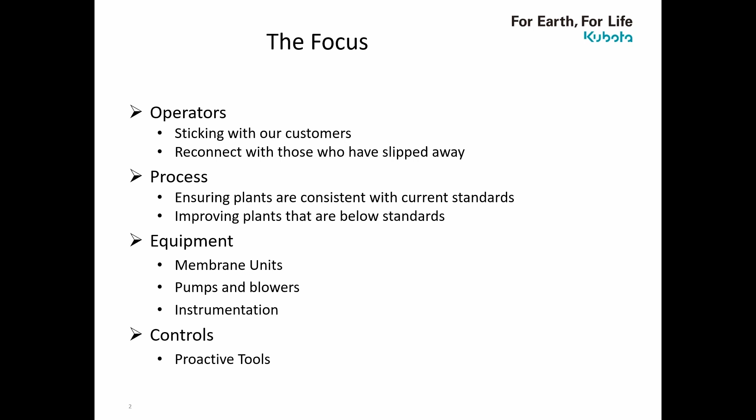But really where we've made a lot of changes is on the HMI side, the interface that you look at your plant through, your SCADA software, your trends, your alarms, and things like that. So I'll talk about some of the things that we're doing there to make it easier to operate, and again, be proactive rather than reactive.

So I talked about the operators. You guys really are the greatest asset for us. If you're not happy with what we're doing, then we need to try to correct that and make improvements.

You know what the plant does and what it doesn't do, and so we'll look at your influent flow, your effluent numbers, and we'll try to fine tune the way the plant is operating off of that.

I bring up training quite a bit. Everybody on this presentation from the Kubota side has been in this business a long time. And so we understand that sometimes there's operator turnover and some new people come in. And so we need to get out there and do some training. And even if you've been at your plant a long time, we still like to come back in and do training. We do events like this.

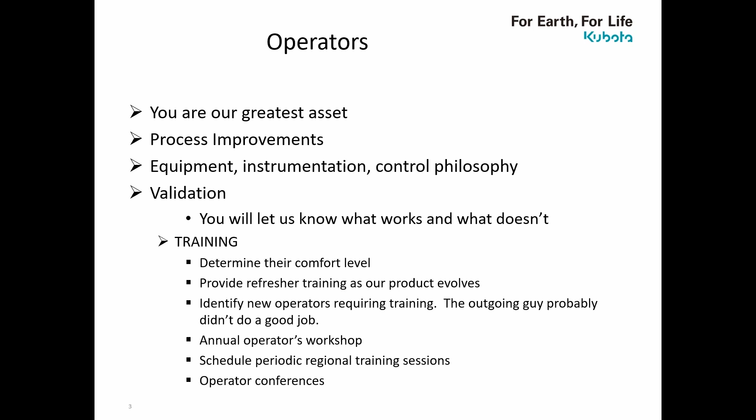Hopefully we can get back to doing them in person soon. But we just want to bring everybody up to speed and let you know what the latest evolutions might be in our approach with our products, our overall systems approach, and just give you some training to make sure that you're still comfortable with the plant and what it's supposed to be doing.

So when it comes to an MBR, again, it's more than just about the membranes. It really is a group of subsystems, and we want to make sure that each of these is designed properly, first of all, but secondly, being maintained and operated correctly. And so the first one is the biological process design, right? We have to treat a certain amount of flow. We need to meet a certain effluent quality. So we want to look at that as a big picture item, make sure, is the plant doing what it needs to do? And if it's not, where do we go and look for avenues of troubleshooting?

Hiro pointed out what we call the fishbone earlier, and really that's just a cause and effect diagram that we use to allow us to troubleshoot different parts of the plant. We have a fishbone for membrane performance. We have one for nitrification, denitrification, really each aspect of plant operation. We have these troubleshooting guidelines in place.

Pre-treatment, talking about headworks and fine screens, and really the screening is the most important piece of equipment in the plant itself. Obviously, if your screens aren't working, you run the risk of damaging the membranes, but it's really a long-term effect that occurs. Debris that gets past your screens, or if there's an overflow, if the seals aren't properly installed and you just get carryover into the plant, eventually that debris will build up and accumulate.

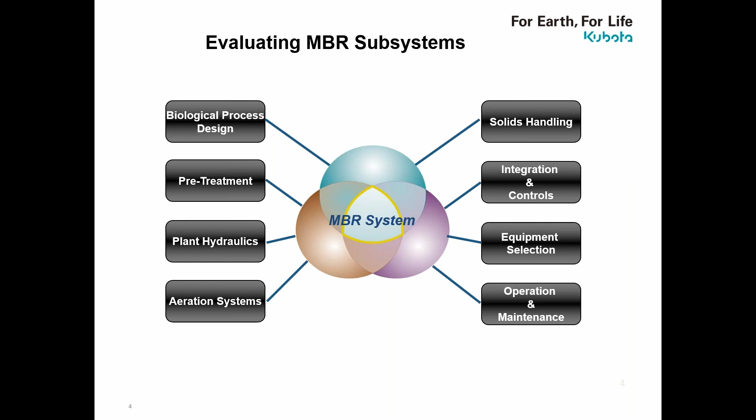And when we start up the plant, come back and give you training, or we upgrade the system, we'll go through all these things again to make sure you're up to speed on what's required. So that's the system approach to an MBR. And the day-to-day things that we'll pay attention to, as Hiro mentioned, he talked about most of these. You've got your transmembrane pressure and permeability. We'll give you guidelines and thresholds about when it's time to make a change or do a chemical clean.

Your air scour rate, that's very important to making sure the membranes stay clean. We're maintaining the biofilm. We're keeping that pumping action going like it should go. Pay attention to the permeate. Your plant is designed for a certain flow rate or capacity, and we'll typically size it up for a design flow and a peak day flow and a peak hour flow. We just want to make sure that we're staying within the design points on a day-to-day basis. We don't want to get in there and try to process more water than it needs to.

For instance, if you have an equalization tank ahead of your plant and you just want to hold up some of that flow overnight and come in the following morning and run it at 3 times its normal value, yeah, that saves on some operation through the night, but it could lead to faster fouling of the membrane. So let's let the plant do what it's supposed to do.

We'll check the process aeration. And when it comes to DO in the system, we have found that just enough is the best approach to go with. We just want to make sure we're putting just enough membrane air to keep them clean, and just enough air for the DO requirement of the process, and don't waste. We want to keep the DO down as low as possible. Even if your plant does not need to denitrify, if we can set it up and operate as if it does, your overall plant's going to run much more efficiently. The process will be better. You'll have better energy efficiency, so that's the way to go.

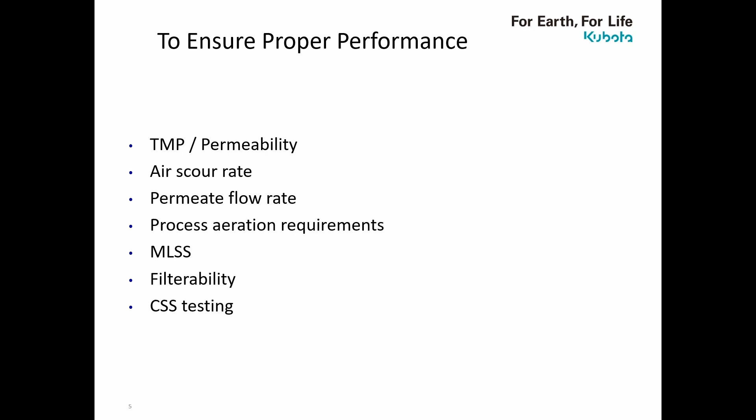Everybody hear me okay?

All right, so when it comes to your process, part of our jobs here at Kubota is to visit the plants and just look at how they're operating and look for improvements to make them more efficient. So we'll look at your influent flow, your loading, your effluent numbers, and say, okay, where can we make an improvement? So we look at your mixed liquor, your air rates, your flux rates, etc.

Sometimes the plants, they'll say it's designed for 1 million gallons per day, but it's only seeing 250,000 gallons per day. If we're using the entire plant to treat that lower than design flow, first of all, it'll be energy inefficient because we're using more air, more membranes than are required. We also might have a lot more process volume than is necessary. So you end up with a really long sludge age, and that can lead to fouling mechanisms on the membrane. So that's one of the things that we'll look at.

We'll do biological calculations and look, will it help the plant if we take volume out of service? And so oftentimes that can be putting some bypass lines or adding some piping and valves to allow us to maybe take an aeration zone out of service, or do some programming changes such that we don't use all the membrane zones on a day-to-day basis. We'll basically make it such that we can turn down the plant to match the capacity to the influent flow and try to pair those up as equally as possible.

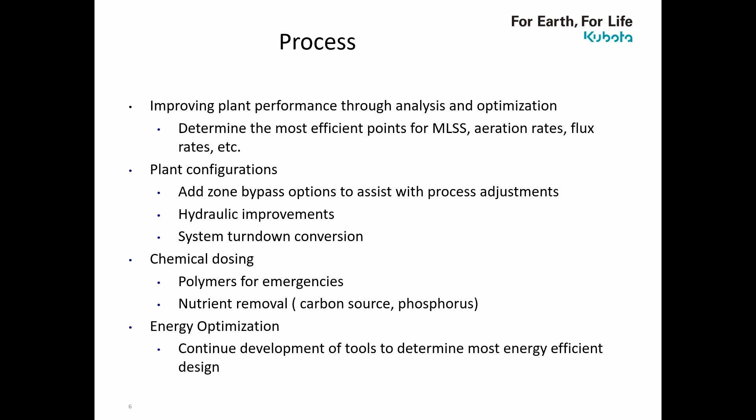So if you do have those old bar screens, that company's no longer in business in the United States, but we have identified options to replace them that are similar in size and economical approaches, but get us up to the screening performance that we like to see.

Pumps and blowers, particularly on blowers, a lot of you probably have the old positive displacement blowers that maybe are 10 or 20 years old now and are not very efficient. There's a lot of new PD blowers out there that are really good. They're compact, they're quiet, they come in their own sound enclosures, and they're really getting more efficient. Turbo blowers were quite the rage 8 and 10 years ago.

I'll just point out when it comes to turbos, you need to be very careful with the selection and the application, because as compared to a PD, they have limited turn down. A good PD blower is going to give you a 4-to-1 turn down, which is nice when you're talking about an MBR plant and optimizing its performance. But a turbo blower, the turn down is usually about 2-to-1.

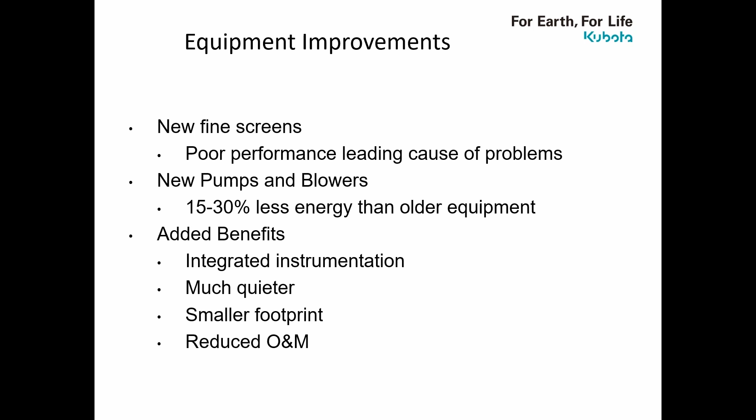And then again, we want to make sure the plant overall is fine-tuned for matching the flow with the operating equipment. So we can look at newer equipment, new screens, pumps, blowers, make your plant quieter, reduce the footprint, and ultimately make your life easier by reducing the operation and maintenance requirements.

When it comes to airflow control, the preferred setup is to have a blower dedicated to the service. So a blower dedicated to your membrane tank, a blower dedicated to your pre-air zone, and you just put it on a VFD and you eliminate airflow control valves. Like I said, we typically use positive displacement blowers because they do have a good turn down, but we can look at the approach there.

When it comes to actually controlling the air, sometimes we do have a single blower that will supply multiple services, and we'll have airflow control valves, actuated valves. So we just want to make sure from a control standpoint that we're monitoring the air and controlling it. What we want to try to avoid is one blower supplying multiple services through valves that are mostly closed, so you're bleeding a lot of energy across that valve, and it makes it hard keeping the pressure and flow rate where you need them. So we'll just look at that closely.

When it comes to aerated zones, we want to keep them at a nice constant level, and I'm talking about good airflow control here.

So that's why you'll see in a lot of our plants, we do what's called a pumping forward concept, meaning the varying levels in the anoxic zone, we'll use that to control the plant, and we'll pump forward into the aeration zone, and then it'll flow by gravity through the aeration back to the membrane zones and back to the anoxic zone. So that's the internal recycle.

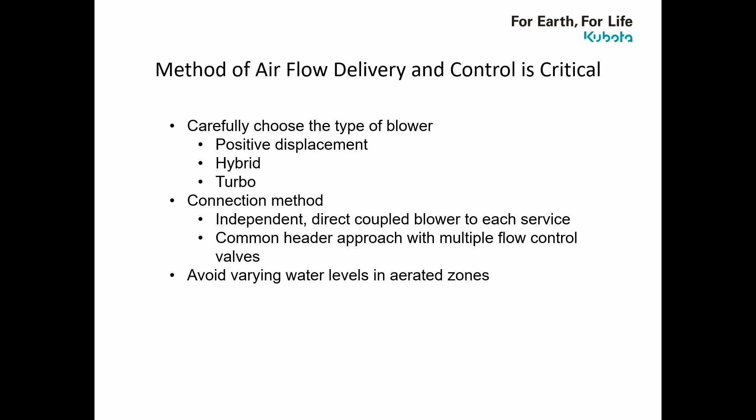By taking that approach, we use varying level in the anoxic, get some partial equalization, but it does keep the aerated zones at a nice constant side water depth, and that does help with controlling that airflow, and we don't have a varying back pressure that shows up on the blowers.

All right, equipment upgrades. So we continue to evolve our systems. What we do now is drastically different than if your plant's 15, 20 years old. And so part of what we'll do with our evaluation is look at where does your plant compare to current standard, our current approach, and we'll look at where are the areas that we can make improvements.

Electrical actuators, eventually they are going to go out. And so we actually look at maybe upgrading those and doing what I'll call a top shelf type of actuator that will last longer and give you some headache-free operation. I've actually seen the failure of an actuator lead to a plant overflow or fouled membrane simply because it was a nuisance and it eventually locked up in a certain position and caused a problem.

Flow meters, we'll make sure that those are working correctly and look at newer versions if that is an option for an improvement. I mentioned some of the instrumentation that we add to help you be more proactive again. And then I always recommend having spare parts for some of the critical components or critical control items. Actuators, right? I just mentioned they can lead to problems.

Level transmitter, that's actually what controls the speed of your plant, if you will, is the level within the system. We'll put it into either a low flow, a medium flow, your peak flow settings. So that all is based on the level in the system.

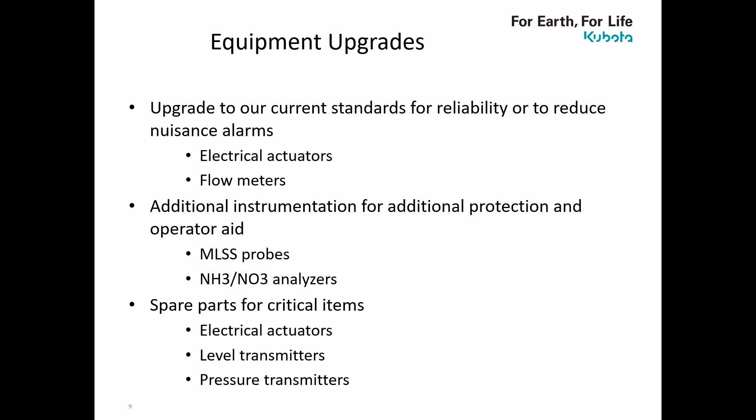It reads the raw pressure, and then our computer, the PLC, converts that into transmembrane pressure. As Hiro pointed out, that's the differential pressure across the membrane. So our computer basically looks at the pressure during filtration, compares it to the pressure during relax, and that's our transmembrane pressure. So that's a very key component. We do have automatic shutdowns associated with TMP, and so if your pressure transmitter goes out, it's going to calculate a high TMP, and then your plant shuts down. So it's good to keep those on hand.

All right, membranes. So we've got a full variety, a full family, and what I'm showing here is what I'll call generation 1, if you will, with the 510 cartridges. And for those of you that don't know, the 510 just refers to the dimensions of the cartridge in meters. So that's a 0.5 meter wide by 1 meter tall. And then we've got the 515, 1/2 by 1.5 meters tall.

And then on the right, we have our SP series, which is the newer version, and I refer to that as the Lego version of a membrane. Really, these modules have smaller plates within them, and they basically stack together and snap together. So they're very modular, and we're actually doing a lot of new plants with this membrane, but also some upgrades and replacements with the new one.

So what we'll do is look at the specifics of your plant and figure out what is the best approach for the membrane unit that will work the best. We'll look at tank geometry, available side water depths, mixed liquor concentrations that are best for your plant, and that'll determine which unit we'll use.

I will say that a lot of our installations have been upgraded that have the old style EK400, the double stack, you see that on the left. We've actually replaced that with what's called an RM200. It's a single deck version of the 515 cartridge, but it gets you basically the same capacity. It's in the same footprint, but it's more energy efficient. It is single deck, so it's easier to clean and maintain.

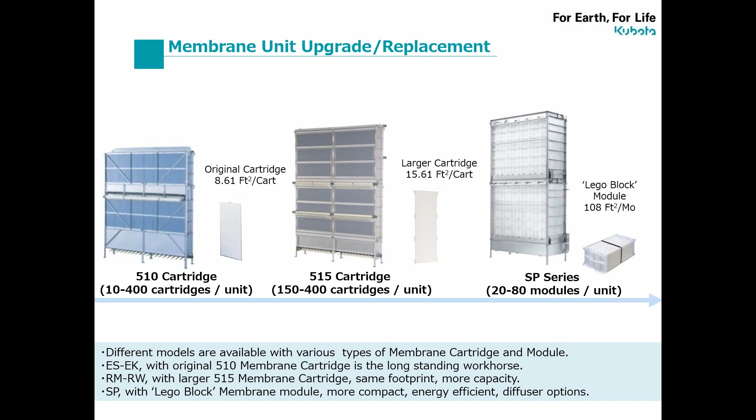We can actually get more flow in the same tank geometry as compared to the other units. All right, so the obvious question is, when is it time to replace your membranes? Obviously if they're damaged, and as I mentioned, really the first indicator will be high turbidity, or you're getting high fecal counts coming through your system.

What we'll do at that point is do a trial and error. We'll isolate it down to an individual unit, and then basically identify which part of the system is potentially damaged. At that point, we'll have to put some hands and put our eyeballs on the membranes and look for which membranes are damaged. And we can do some testing.

The membrane module itself is clear polypropylene, so we can use that to help us identify where we might see some sludging and help us get to the root cause of what caused that damage. As I mentioned earlier, oftentimes we trace that back to screening performance, which is really what causes these issues.

Eventually, the membranes do get old, as Hero mentioned, and before we get to the determination of, do we need to replace the membranes now or can we wait, we actually will send the membrane material back to Japan and do the testing that he described. We'll do some strength tests. We'll do chemical cleaning procedures to determine what's the best chemical cocktail that will work to recover the membranes.

If we are seeing some degradation in strength and cleaning procedures, that's where we'll start having the conversation about when to replace the membranes and how many. Obviously, if you're going through a plant expansion, that's the time to look at newer membranes. As I mentioned, many of the plants have done this over the last few years. We'll fine tune the membrane model that works best for your given situation at your plant. So we've got a lot of flexibility there.

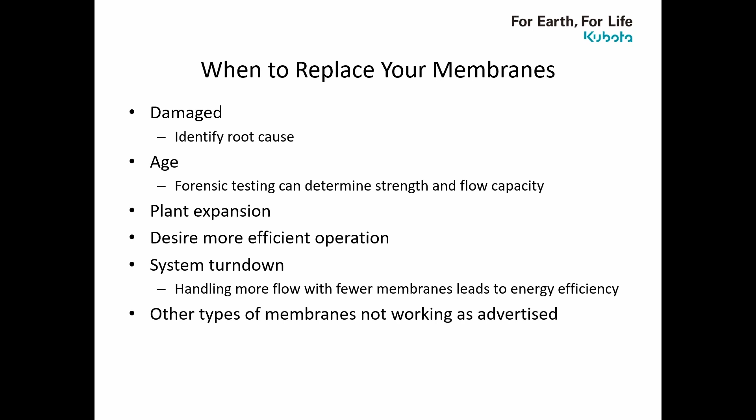And then as Joe mentioned on his plant there in New Jersey, we've been going through this a lot lately. If your existing membranes are just not working as advertised, if they're turning out to be not quite as bulletproof as you were originally told, then we have options and good success in replacing those other types out there as well.

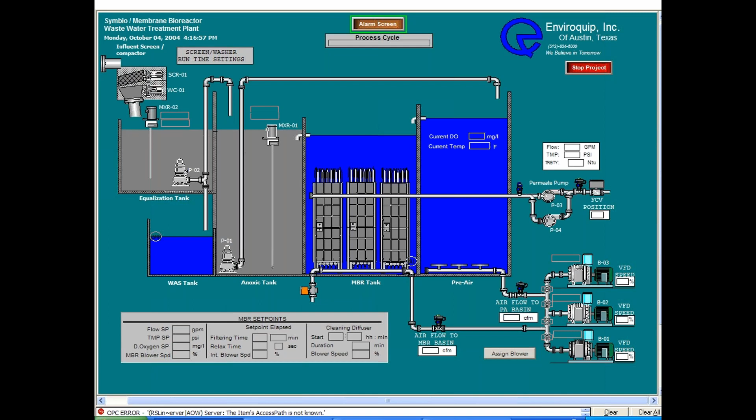On the control system side, as I said, the PLC is still what does the automatic function of the plant, and that really hasn't changed much over the years. In fact, a lot of the original plants are still using the original hardware. But where we have changed is on the HMI side, the operator interface. This is a screenshot of an old plant from a long time ago, and that's basically the entire representation of your plant. You don't get any more information than that.

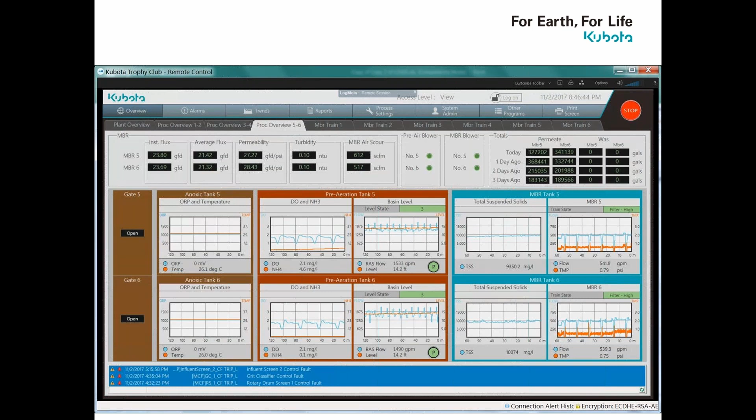This is our approach today. We use what are called mini trend lines, so we can set up trends for all the critical parameters, and we can overlay them. We can custom configure what's best for your plant or the information that you want to see. What we found is a moving line grabs your attention much easier than just a wall of numbers. So a lot of these older installations, we've upgraded the controls to this newer operator interface system. Again, the idea is to be more proactive and give you information before things get out of bounds.

All right, so I'm going to go through a couple of quick case studies of some plants that we worked on. A small plant here in Texas was having some issues. There was some hydraulic imbalance. The membranes were constantly being sludged up. They actually had a couple of overflow incidents, short circuiting where flow was preferentially going to one side of the plant. And of course, all of that was blamed on the membranes.

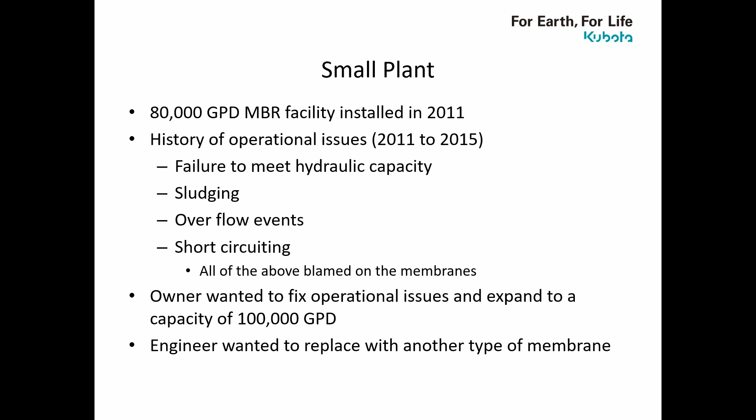So we went back and looked at the plant again as a whole, looking beyond just the membranes at the root causes. Sludge, overflow, short circuiting: it's got to be a problem with the membranes. So when they were looking at this, they really just wanted to move away from the existing membranes altogether and try something new.

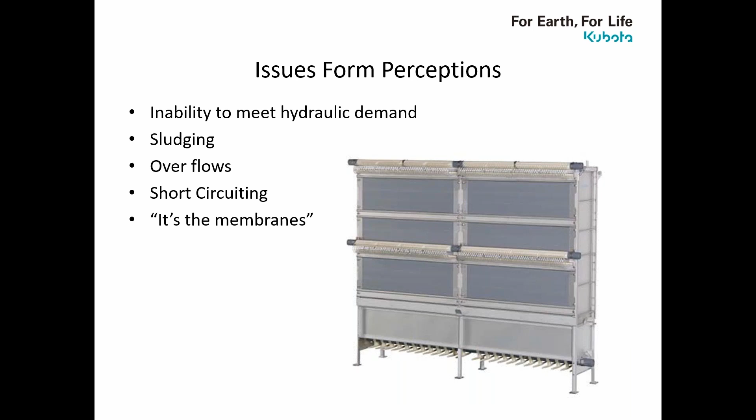And it really wasn't, that was not the case. It was fundamentals. The fine screens were not working properly. Like I said, they had a 2 millimeter bar screen that was not correct. So we replaced it with the drum screen.

We corrected the hydraulics. We split the plant in half and made it completely symmetrical such that the RAS returns were both the same, and that kept the mixed liquor concentrations on both sides of the plant nice and equal. We replaced the permeate pumps to reduce the cavitation and make sure that it was really a good self-priming pump, and eliminated that airlock.

Again, Hero showed you that video of air bubbles getting through the piping. And that's coming through the membranes. You've got dissolved air and gases that are in the mixed liquor. And when you're pulling a vacuum to get that water through your membranes, it will come out of solution. And depending on the velocity of the fluid, it can build up in the pipe on the inside of the membranes and will actually air bind that flow of water.

And so it will appear that you have high TMP when it's really just air slowing things down. So if we can make sure the pumps are efficient and good primers to pull that air out, it goes a long way to eliminating that possibility.

And then we actually updated the control system again to our current standard to make sure they have all the tools available to them. So the fine screens replaced, permeate pumps, SMUs, we fixed the hydraulics, and we had to do it all while running the plant, keeping it online. So I worked with Hero and some of our application engineers and our project managers, and we came up with a really good plan to make that occur.

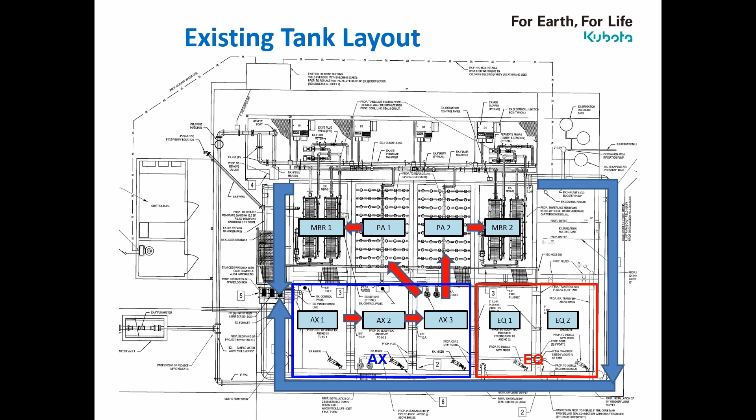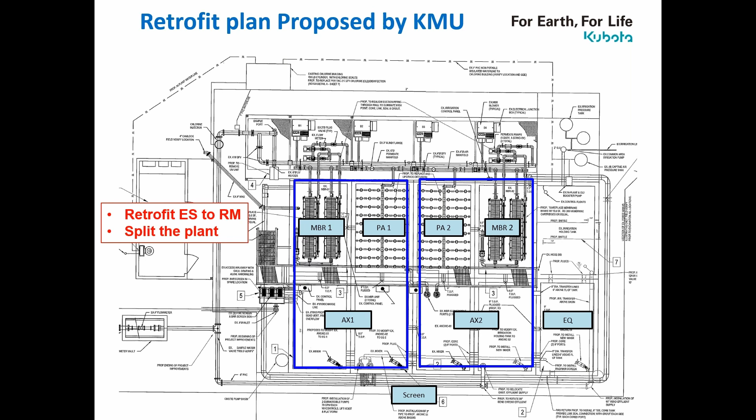So here's the old layout. It was unbalanced. Flow was coming in on one side, and it was not properly splitting the influent flow to both sides of the train. So we basically split it into two identical plants. Now they're completely symmetrical, and all the previous issues have gone away, and it's been running really great for the last 3 years. And then another case study is a bigger plant.

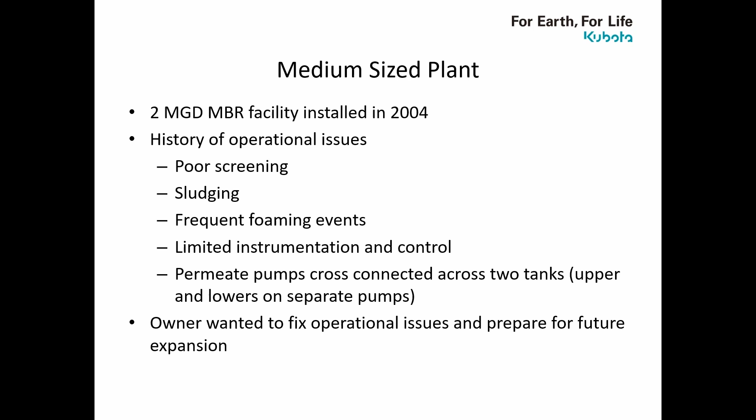Again, this is one of the older installations going back to 2004. Kind of a similar story, poor screens, sludging, foaming events, kind of a limited instrumentation and control system. And then the permeate pumps were cross-connected across multiple tanks, which kind of limited the system turndown and didn't really allow us much flexibility.

So we went in and replaced the old EK400s with a newer SP600, and that's kind of a drawing of what it looked like. The membrane surface area had almost doubled. And even though the rated capacity of the plant didn't need to go up, this did give us more flexibility in terms of turning down the plant. So now instead of using 4 tanks to treat the flow on a given day, we can do it with 1 or 2 tanks. That increases membrane life, reduces cleaning frequency, and makes the plant more energy efficient overall.

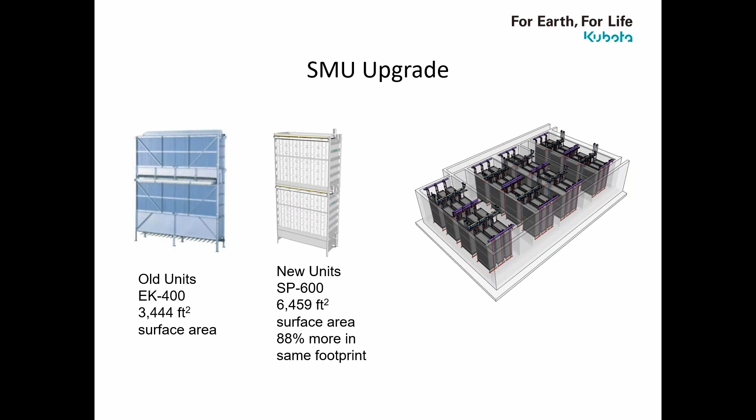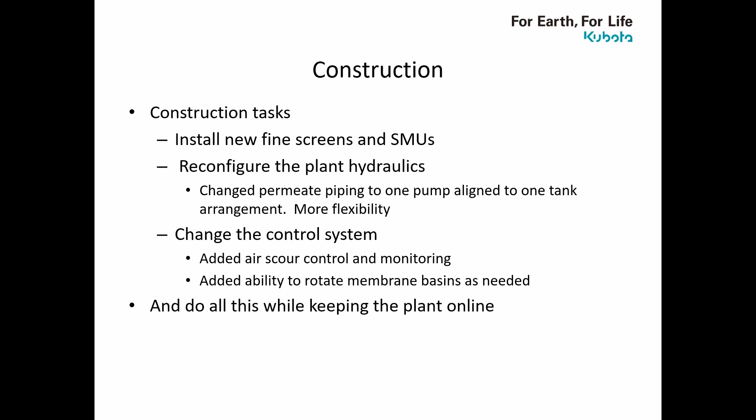And then down the road, when it's ready to do a full-scale plant expansion, the membrane capacity will be in place, and we'll just have to look at adding some additional tankage for process volume. So kind of the same thing. We upgraded the system for the new equipment while keeping it online, and that takes good coordination with the contractor and the Kubota folks, and we've got some good experience in doing that these days.

All right, so replacing other membrane types. As I mentioned, we've been doing this quite a bit lately, and I'll just be honest with you guys, Microdyn membranes seem to be the culprit there. We have quite a bit of experience doing this, and there's some issues just the way they're fundamentally designed that are creating these issues. This is just an example plant, but some of these issues are showing up everywhere.

The membranes are not capable of operating at their design flux rate and design mixed liquor points. And so what happens, you end up derating the plant. You have to lower your flux, lower your mixed liquor. And now the process as a whole is not working like it's supposed to biologically. And to compensate for that, you're having to add chemicals for flux or phosphorus removal.

One thing that's a key component of Kubota membranes, it's a rigid plate with fixed spacing in between. So that prevents the membrane material from bridging across and touching. So that prevents the sticking together of membrane material. And what happens when the membrane sticks together, you lose that surface area.

Now it's preferentially flowing through open areas, and then they start to foul faster. And then before you know it, you end up with membranes that are basically sludged up, as Joe showed in some of his pictures earlier.

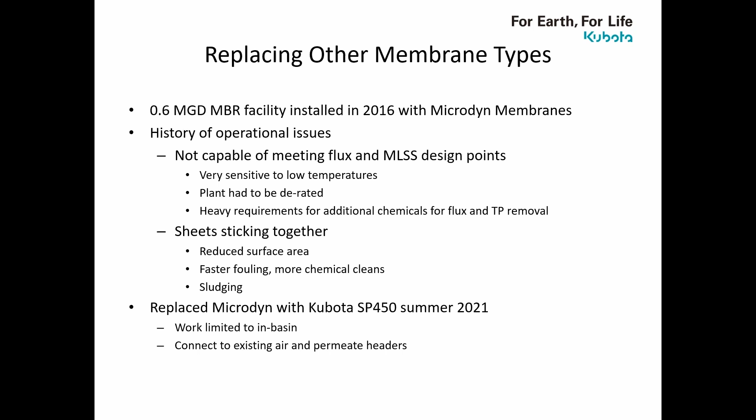So in this particular case, we replaced the Microdyn units with a newer SP series. And again, we've done this at several plants over the last couple of years. Really, it's been a pretty straightforward approach. The work has been limited to in-basin piping. So we'll make some changes to the existing piping, but we'll connect typically to the existing permeate and air headers. And we'll make sure that your pumps and blowers, everything's going to work as it's supposed to, but really the focus has been on the inside of the tank, and there's been very little external work beyond the membranes required to do this replacement.

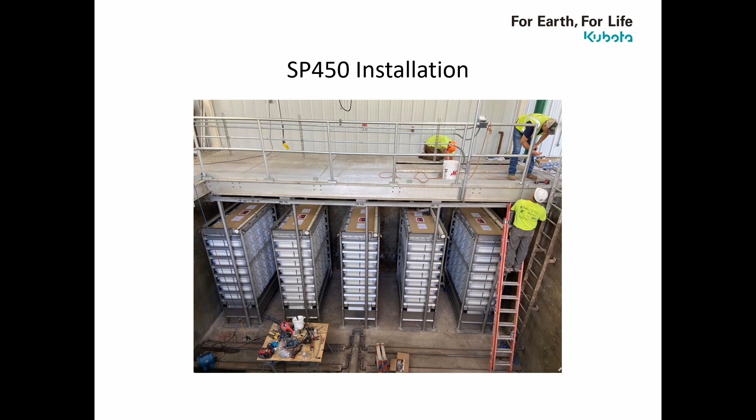Here's just a shot, something similar you saw earlier. These are SP450s that were installed into an existing tank. The old units were pulled out. We put in new mounting plates, new guide pipes. This installation, we did this twice at this particular plant. The contractor showed up on Monday, pulled the old units, got the tanks cleaned out, and by Thursday afternoon, we had these new membrane units up and running. So again, it can happen in about 3 to 4 days.

All right, I'm going to stick my sales hat on real quick, because I know there are some of you out there that maybe don't have an MBR, but are considering it. And I just want to point out some of the things that we like to emphasize at Kubota. We are microfiltration membranes. That means a little bit bigger pore size as compared to some others, but that does allow us a higher flux and higher mixed liquor concentration. And so that does give you more flexibility in how we design and operate the plant.

In our world of MBR, there's always this perception that smaller pore size is going to give you better effluent quality, and that's just not the case. We did a lot of testing internally and also with some engineering firms, and what we found is microfiltration membranes can achieve the same log removal rates as some of these smaller pore membranes. It's the membrane configuration, the thickness of the membrane, the porosity of the membrane, and the biofilm that does a lot of the work. So we can get the same numbers.

They are very easy to use. The cleaning procedures are very simple. We just inject the weak solution, as Harold mentioned, into the permeate pipe. It backfills the membranes under atmospheric conditions, so it's not under pressure. They soak for a couple hours. It's all very easy. Membranes and the mixed liquor stay in the tank. I just mentioned our geometry, rigid plate with fixed spacing. That's very important to how these membranes operate and keeping the plant running and keeping those chemical cleans to a minimum.